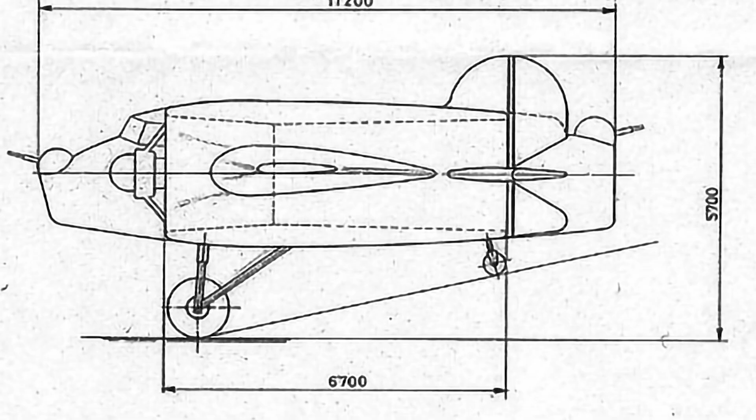The early 1930s were a strange and electric time to be an engineer. Across Europe and America, designers were throwing out the rulebook on what a flying machine was supposed to look like. Biplanes were giving way to monoplanes. Engines were getting stronger. Speed records were being broken and then broken again. It was the kind of era where a genuinely crazy idea could get funded, built, and flown before anyone had time to talk you out of it.

And in the middle of all that ambition and experimentation, one aircraft stood completely apart from everything else. An Italian creation so bizarre in its appearance that serious experts would call it the ugliest airplane ever built, and so ahead of its time that the rest of the world would spend the next several decades quietly catching up to it. The story of the Stipa-Caproni begins not in a factory or a wind tunnel, but in a trench.

Luigi Stipa was born in Italy in 1900. When the First World War came, he interrupted his university education and enlisted with the Bersaglieri Corps, one of the Italian Army's elite light infantry units, known for their distinctive wide-brimmed hats and their reputation for speed and aggression on the battlefield. Stipa survived the war and came home with the kind of focus that tends to follow men who have watched their youth disappear into a conflict they did not start.

He returned to his studies, and he did not stop at one degree. He earned qualifications in civil engineering, then hydraulic engineering, then aeronautical engineering, thus building a technical foundation so broad that it would eventually allow him to see a connection that nobody else in aviation had managed to see.

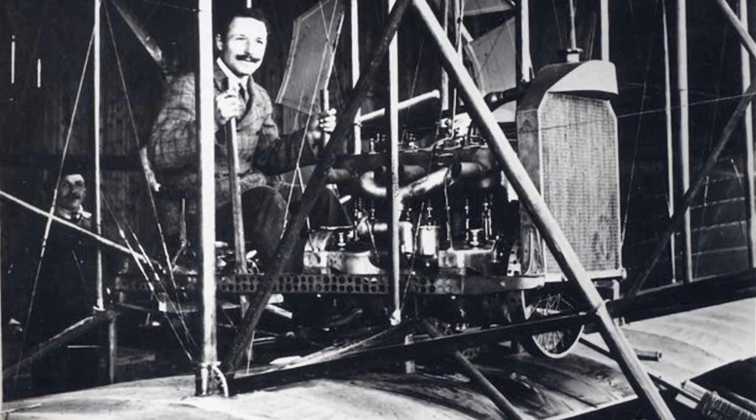After graduating, Stipa joined the Italian Air Ministry and worked his way up through the engineering division until he reached the position of General Inspector of the Air Force Engineering Division. It was a title that gave him both the authority to pursue serious research and the access to the kind of resources that turned theoretical ideas into real hardware.

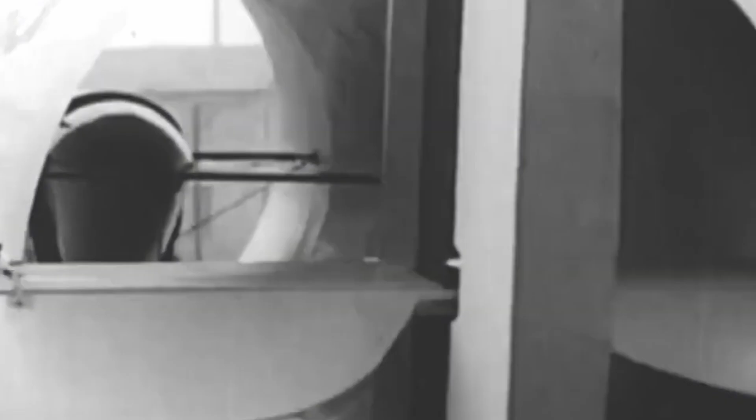And he had an idea, a genuinely unusual one. Stipa had become obsessed with a problem that most aviation engineers of his era had simply learned to live with. Conventional propellers were wasteful. Aircraft engines of the early 1930s lost a significant portion of their power to turbulent, disorganized airflow. The propeller spun, it pulled air, but much of that energy scattered and dissipated before it could be converted into useful thrust. Everyone knew about the inefficiency. Nobody had found a satisfying solution to it.

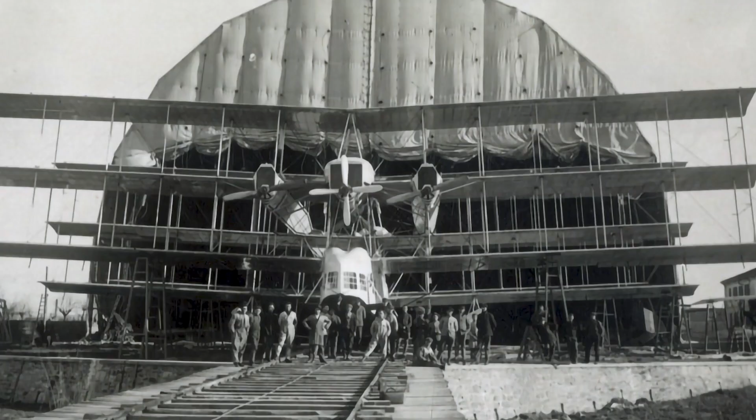Stipa's background in hydraulic engineering gave him a perspective that pure aeronautical engineers did not have. He kept coming back to the Venturi principle, a well-established concept from fluid dynamics stating that when a fluid passes through a narrowing tube, its velocity increases. Engineers had known this for over a century. They used it constantly in hydraulics, in carburetors, in all kinds of applications. But almost nobody in aviation had thought to apply it directly to propeller design. Stipa saw the connection clearly.

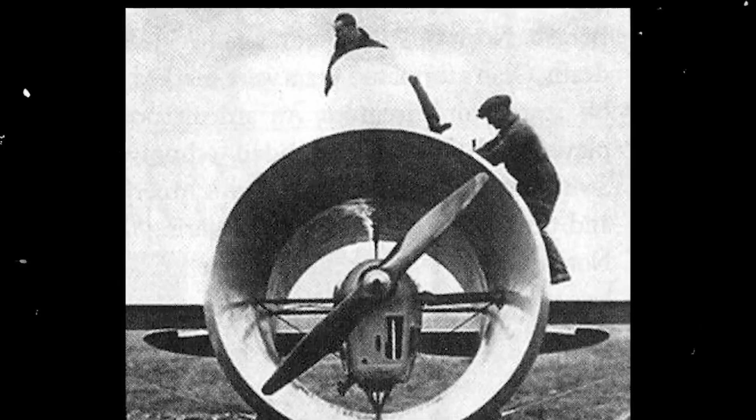If he could enclose a propeller inside a carefully shaped tube that narrowed in the middle, the airflow passing through it would be compressed and accelerated. The result would be dramatically greater propulsive efficiency from the same engine. He devoted years to working through the mathematics at the Air Ministry, calculating the exact shape the tube's interior surface would need to take, the optimum design of the propeller itself, the most efficient distance between the leading edge of the tube and the propeller blades, and the ideal rate of revolution for maximum effect.

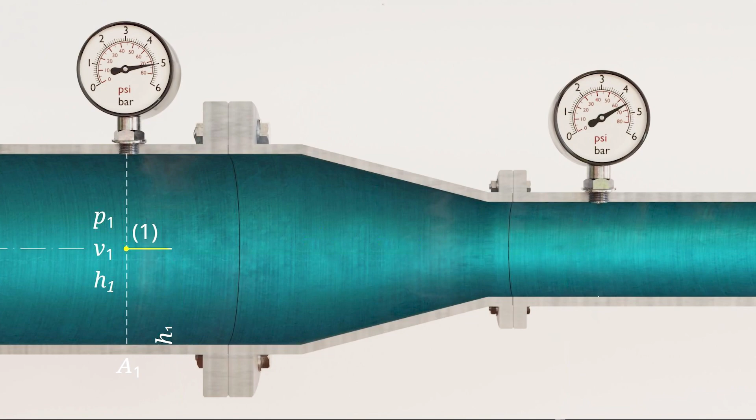Then he arrived at something he had not expected. When he calculated the inner surface shape required for maximum efficiency, it closely resembled the cross-section of an aerofoil. The tube itself, shaped correctly, would generate lift. The thing he had designed to improve propulsion would also, as a side effect, help the aircraft fly. He called his invention the intubated propeller, and he was convinced it could change aviation permanently.

Stipa published his findings in the Rivista Aeronautica, one of Italy's leading aviation journals, alongside detailed designs for a small single-engine test aircraft that would demonstrate the concept in actual flight. The publication attracted attention, but Stipa understood that a paper, however well-reasoned, would not be enough. He needed to build the thing and fly it in front of people who could see it working with their own eyes. He petitioned the Italian fascist government directly, requesting funding for a full-scale prototype. The timing helped him.

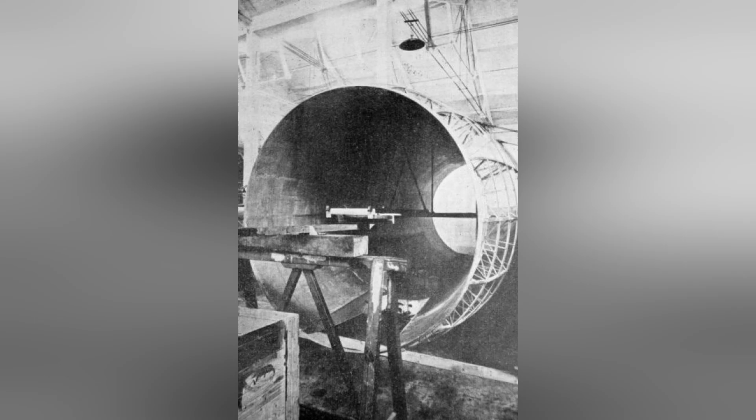In 1932, Mussolini's regime was actively hunting for opportunities to demonstrate Italian technological superiority to the rest of the world, and aviation was one of the fields where national prestige felt most visible and most valuable. Despite the radical nature of what Stipa was proposing, the government said yes. The Air Ministry approved the funding and began looking for a manufacturer capable of building something no aircraft factory had ever attempted before. They needed someone technically skilled enough to handle the engineering challenges and bold enough not to be frightened off by how strange the whole thing looked on paper.

As it turned out, Italy had exactly the right man, and his name was already a legend. Count Gianni Caproni di Taliedo had been building aircraft since 1910, when he constructed the very first airplane ever made in Italy. He had taught himself to fly, and in the early years he had designed his machines largely through trial and error, crashing several prototypes before he managed sustained flight.

But Caproni learned at a remarkable rate. By 1914, just 4 years after his first attempt, he had produced the world's first single-seat tractor engine fighter with a forward-firing machine gun, an achievement that placed him at the absolute forefront of military aviation before the First World War had even begun. When the war came, the Italian military gave Caproni one assignment: build bombers.

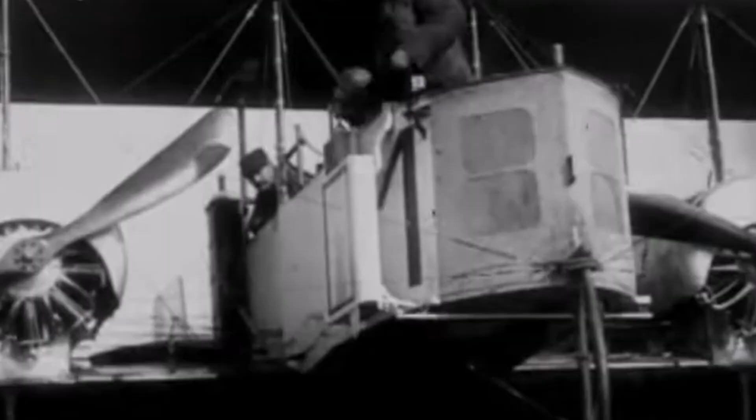He delivered a series of increasingly large multi-engine aircraft that became some of the most formidable strategic bombers of the entire conflict. His CA-3 series carried out long-range raids against Austrian targets. This, and the sheer scale and ambition of his designs, gave him an international reputation as a man who was willing to go bigger and bolder than anyone else in the industry.

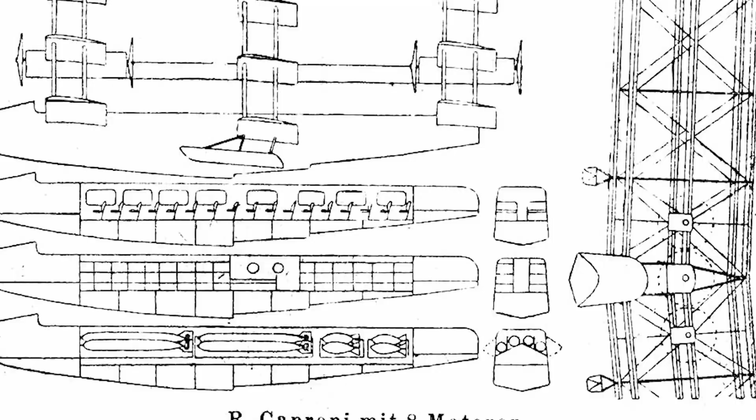After the armistice, most aircraft manufacturers pulled back and played it safe. Caproni did the opposite. His most spectacular post-war attempt was the Caproni CA-60 Transaereo, an enormous flying boat designed to carry 100 passengers across the Atlantic. The machine had 9 wings arranged in 3 sets of 3, 8 engines, and a hull the size of a houseboat. It lifted off Lake Maggiore in March 1921, climbed briefly, then nose-dived straight into the water and broke apart. The wreckage caught fire overnight under circumstances that were never fully explained, and the CA-60 was never rebuilt.

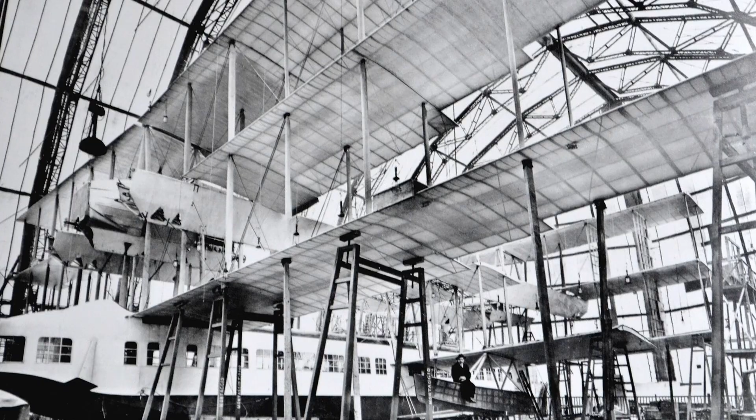But the failure did absolutely nothing to reduce Caproni's appetite for unconventional projects. He kept building throughout the 1920s, and when the Air Ministry came looking for someone to construct Stipa's radical prototype in 1932, the answer was obvious.

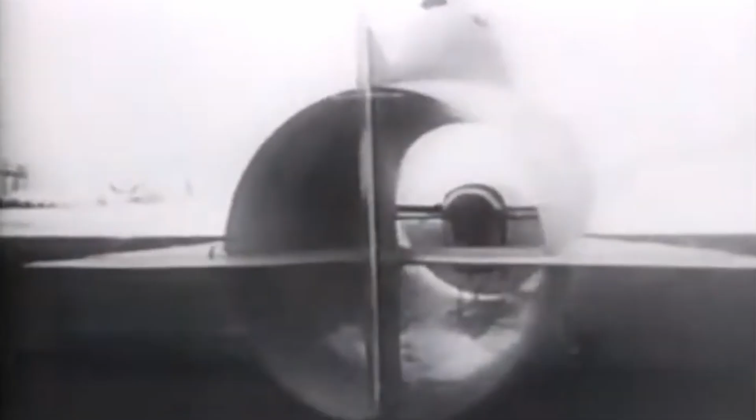The contract called for a single flyable aircraft built around the intubated propeller concept. What that meant in practice was a fuselage that was not a fuselage in any conventional sense. It was a short, fat, barrel-shaped tube made primarily of wood, open at both ends, narrowing toward the middle to form the tapered duct the Venturi principle required. Air would enter through the wide front opening, get compressed as it passed through the narrowing section where the propeller was mounted, and exit through the rear with significantly increased velocity. The entire body of the aircraft functioned as one single massive ducted fan.

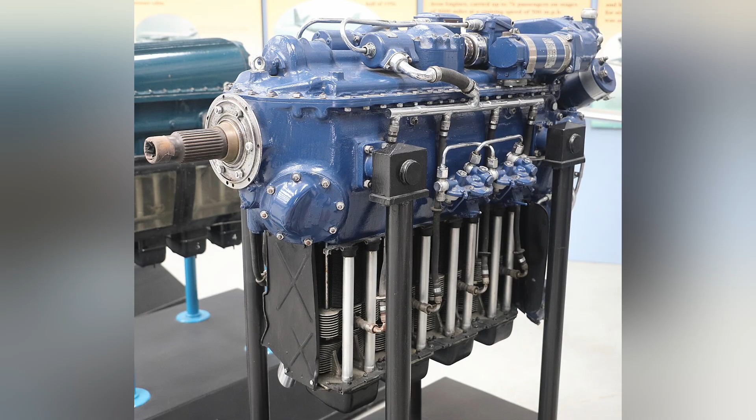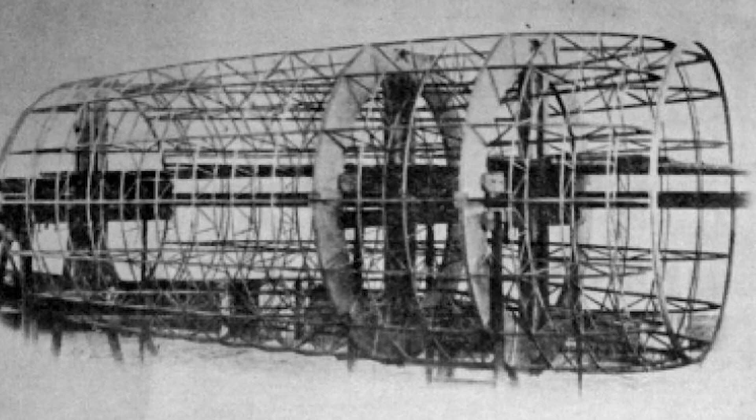Mounting the engine inside this tube required engineering that had no precedent. A single 120 horsepower de Havilland Gipsy III, a 4-cylinder inverted air-cooled inline piston engine, was installed in a nacelle suspended at the center of the duct, with the 2-bladed propeller positioned flush with the leading edge. The engine sat behind the propeller at the midpoint of the tube, and the nacelle had to be supported by structural members carefully positioned to avoid disrupting the airflow that the whole design depended on. Every component inside the tube had to sit in exactly the right place. Even small disturbances to the flow could compromise the efficiency gains Stipa had spent years calculating.

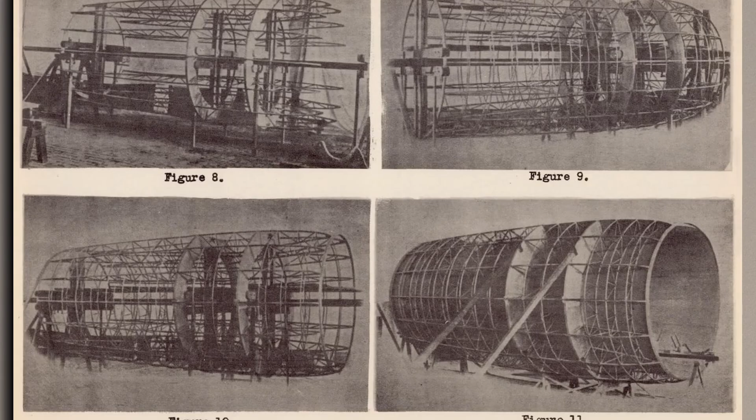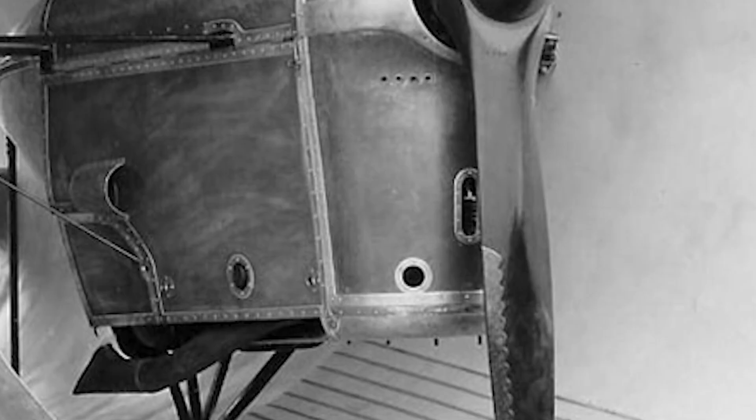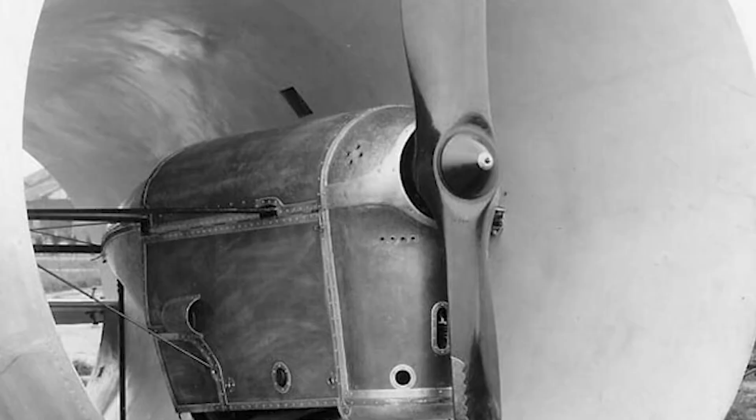The wings created their own problems. The aircraft was configured as a mid-wing monoplane with elliptical wings attached directly to the tubular fuselage. The main spars had to pass completely through the tube and through the engine nacelle inside it, making the internal structure far more complex than the simple barrel-shaped exterior suggested. From the outside, it looked almost comically simple. From the inside, it was one of the most intricate small aircraft anyone had attempted to build.

The world was about to see something it had never seen before. The finished aircraft was a strange thing to look at. The wingspan stretched nearly 47 feet across. The fuselage was barely 20 feet long.

The result was a machine that was more than twice as wide as it was long, squat, and barrel-shaped, sitting low to the ground on stubby fixed landing gear with wheel spats. It looked less like an airplane and more like someone had attached wings to an oversized oil drum and dared it to fly. No other aircraft in existence looked anything like it.

Gross weight came to 1,874 pounds. Empty weight was 1,257 pounds. The strange machine was complete. Now someone had to fly it.

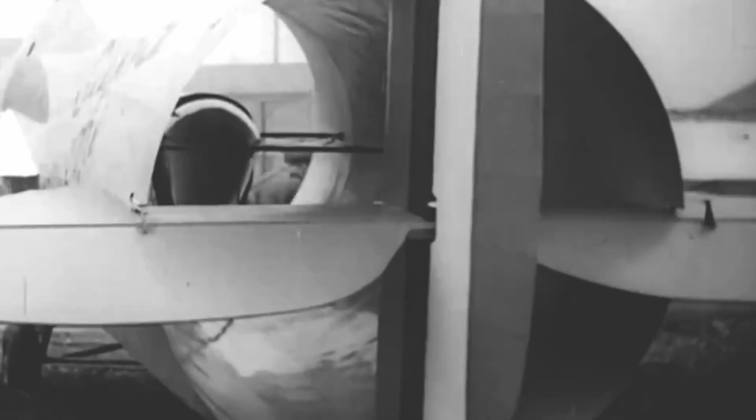On October 7, 1932, Caproni Company test pilot Domenico Antonini climbed into the forward cockpit and prepared for the first flight. Ground crews had already run the de Havilland engine through its checks. The 2-bladed propeller was spinning inside the barrel fuselage, pushing compressed air through the tapered duct with a sound that observers immediately noticed was different from anything they had heard before, quieter, more muffled, as if the tube itself was swallowing part of the engine noise before it could escape. Antonini released the brakes. The aircraft rolled approximately 590 feet before lifting cleanly into the air.

What the people watching saw next stopped them. A stubby barrel-shaped machine climbing steadily away from the field, its wide wings holding it aloft, looking for all the world like a piece of industrial equipment that had somehow decided to become an aeroplane.

The flight data confirmed what Stipa had spent years calculating. The intubated propeller was working. The compressed airflow through the Venturi-shaped fuselage was converting a greater percentage of engine power into usable thrust than a conventional open propeller of the same size and rating could manage. The aerofoil-shaped interior of the duct was generating additional lift exactly as predicted, supplementing the wings in a way nobody had ever achieved before on a production airframe.

The numbers that came back from those early flights were remarkable. Landing speed was just 42 miles per hour, significantly lower than anything with comparable power and wing loading could match. The landing roll was approximately 590 feet, identical to the takeoff distance. The rate of climb exceeded other aircraft in its power and weight class despite having only 120 horsepower available. Service ceiling reached approximately 12,100 feet. Wing loading sat at just over 9 pounds per square foot at maximum gross weight.

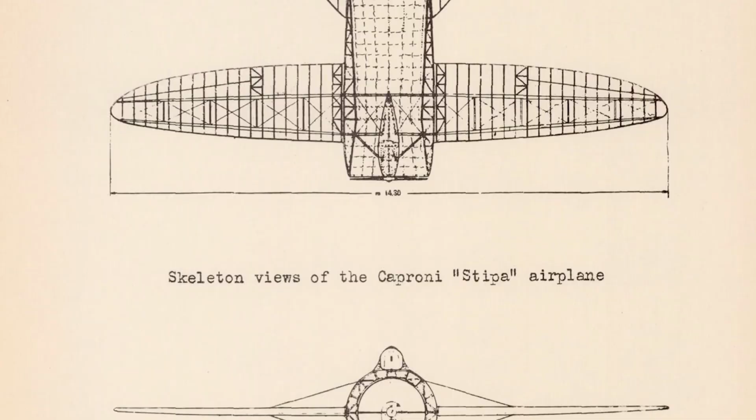The tubular fuselage that made the intubated propeller work also produced an enormous amount of aerodynamic drag. The blunt barrel-shaped body pushed through the air with far more resistance than any streamlined conventional fuselage, and that drag penalty was severe enough to cancel out every efficiency gain the ducted propeller system delivered. Top speed was limited to 83 miles per hour. Contemporary single-engine aircraft with similar power were going faster. The aircraft designed to demonstrate a more efficient approach to flight could not outperform the machines it was supposed to replace. The Regia Aeronautica canceled further development.

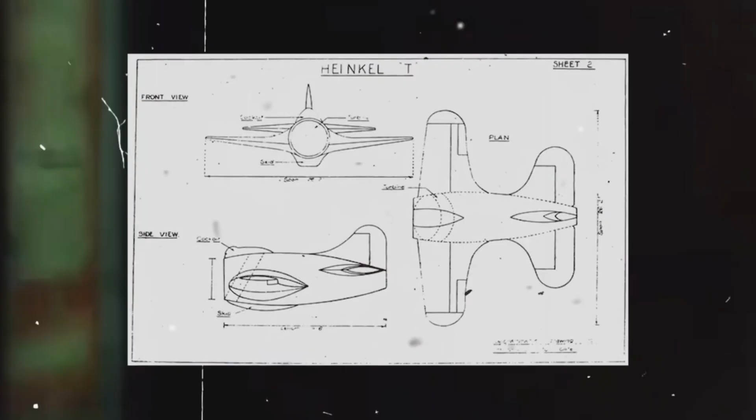No additional prototypes would be built. Stipa had always understood this would happen. The single-engine prototype was never his real vision. It was a proof of concept, a demonstration built to show that the intubated propeller worked in the air and not just in calculations. His actual ambition was far larger.

He had sketched designs for multi-engine flying wing aircraft where several ducted propellers would be integrated directly into an enormous airframe. In those configurations, the drag problem would largely disappear because the ducts would make up a small proportion of the total structure rather than constituting the entire fuselage. Some of his blueprints featured as many as 6 engines housed in ducted nacelles across wingspans that dwarfed anything flying at the time. None of those designs ever left the drawing board.

But Stipa moved quickly to protect what he had built. He filed patents for the intubated propeller not only in Italy, but also in the United States and Germany, securing legal ownership in the 3 countries where aviation development was advancing fastest. The American patent was issued in February 1937 under the title Airplane, covering the core principles of the ducted propeller system. Stipa believed the idea had value far beyond what a single slow prototype had demonstrated.

He intended to make sure nobody could use it without his knowledge. He was right about the value. He was wrong about being able to protect it. The military had moved on. The Italian government had other ideas.

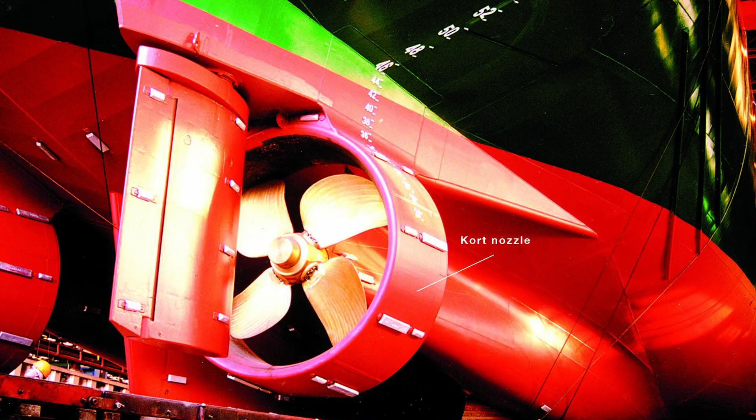In Germany, a parallel development appeared 2 years after the first flight. In 1934, German engineer Ludwig Kort patented a ducted fan system operating on principles that were strikingly similar to what Stipa had demonstrated in the air over Italy. The Kort nozzle enclosed a propeller within a shaped duct to improve thrust efficiency.

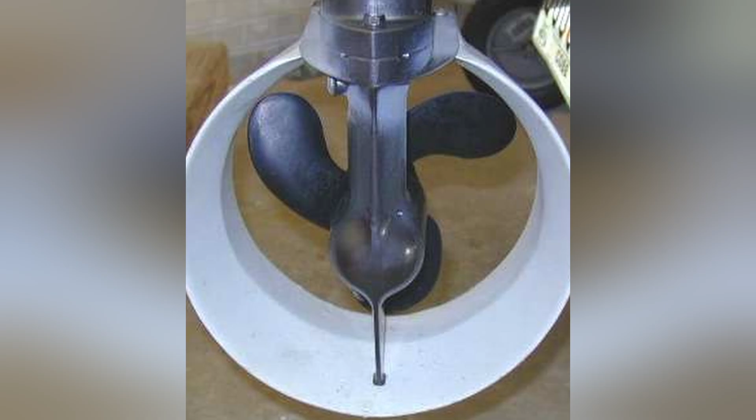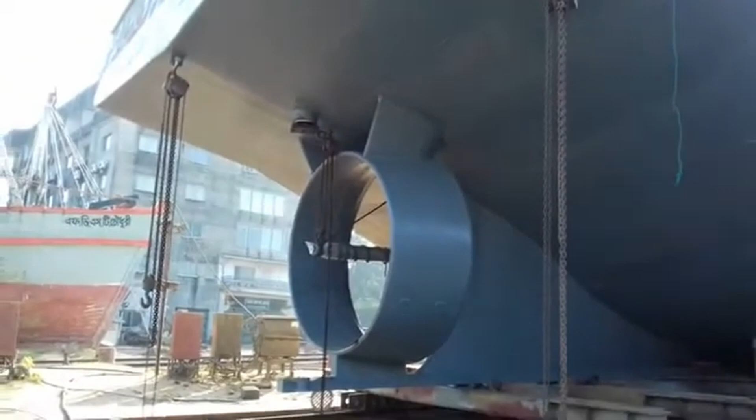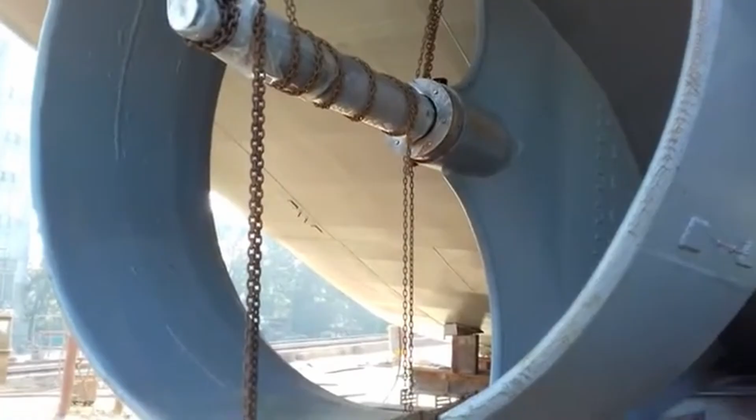The same fundamental idea, applied not to aviation, but to ships. The system proved highly effective on vessels requiring high thrust at low speeds, and the Kort nozzle remains in use on tugboats and working vessels around the world to this day. Whether Kort developed his design independently or drew on the widely published Italian research has never been definitively settled. The timing and the similarities are difficult to look past.

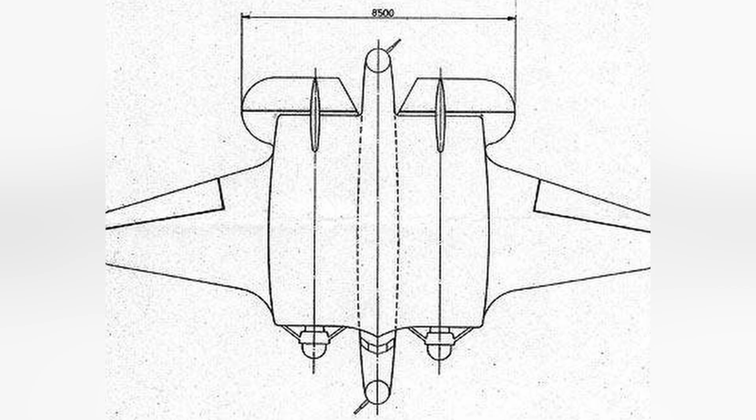France took the most ambitious step. French military planners saw the intubed propeller as a potential solution for a new generation of combat aircraft and commissioned a night bomber incorporating ducted propellers based directly on the Italian designs. The contract went to ANF Les Mureaux, and the resulting aircraft was designated the BN-4.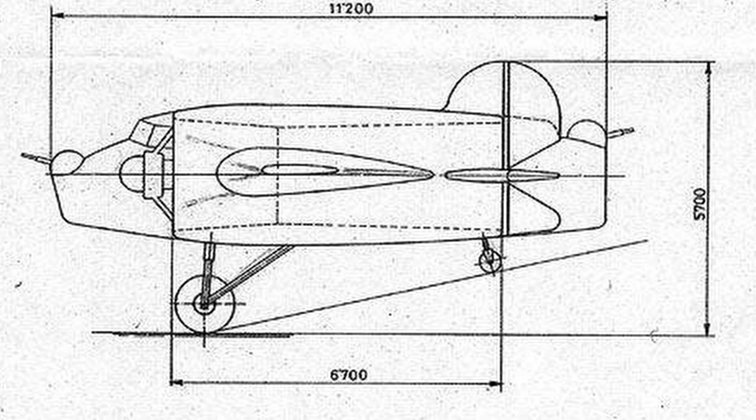The specifications were genuinely impressive for the mid-1930s. A crew of 4, retractable landing gear, 2 power-operated gun turrets, a wingspan of 59 feet, a projected top speed of 233 miles per hour, a range of 1,242 miles, and a service ceiling of 33,136 feet. These were not the numbers of a curiosity. These were the numbers of a serious combat aircraft.

The BN-4 could have proven that the intubated propeller worked when scaled up to a real warplane. It never got the chance. In the mid-1930s, the French government nationalized the aviation industry, merging private manufacturers into state-controlled groups and reassigning contracts across the board. The upheaval swallowed dozens of programs, and the BN-4 was among them. The night bomber was shelved before a single airframe was assembled.

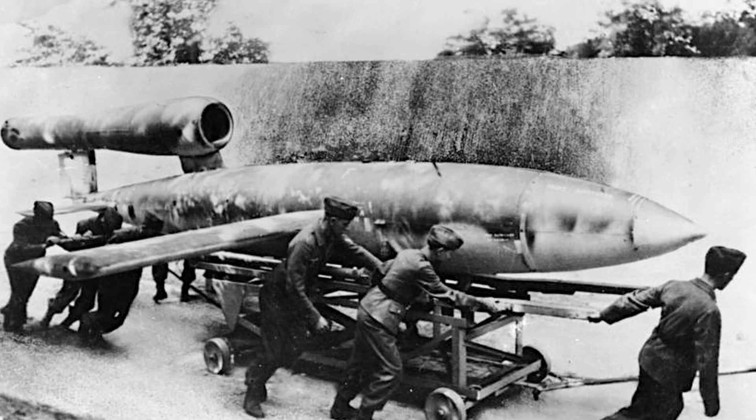Another door closed. Then the Second World War came, and Stipa watched Germany deploy the V-1 flying bomb against England. The weapon used a pulse jet engine to drive an unmanned airframe carrying a warhead across the English Channel, and Stipa became convinced the Germans had stolen his patented designs to build it.

He pointed to his patents filed in Germany and argued that the ducted engine concept had been lifted directly from his intubated propeller. The engineering community disagreed.

The V-1's Argus pulsejet operated on a completely different principle, a series of controlled fuel and air explosions inside a resonating tube, with intake valves opening and closing rapidly at the front to sustain the combustion cycle. There was no propeller, no venturi compression, no aerofoil-shaped duct. The resemblance was superficial and the claim was broadly rejected.

But Stipa remained adamant. The perceived theft deepened a bitterness that had been building for years, a growing sense that the world was using his ideas while refusing to acknowledge where they had come from.

The most direct successor came from Italy itself. In 1940, the Caproni company flew a new aircraft called the Caproni-Campini N1. The connection to Stipa's work was not coincidental.

The N1 used a conventional 900 horsepower Isotta-Fraschini radial piston engine to power a variable pitch ducted fan compressor enclosed inside the fuselage. Air entered through a large nose intake, was compressed by the engine-driven fan, and passed into a combustion chamber in the tail where additional fuel was injected and ignited. The heated gases exited through a rear nozzle, producing thrust that looked and behaved remarkably like what a jet engine would produce.

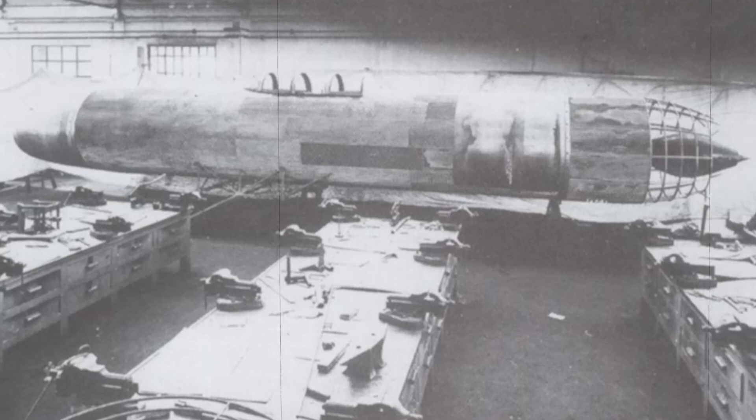The conceptual line from Stipa's intubated propeller to the Campini motorjet was direct and clear. Both used a piston engine to drive a ducted compressor. Both managed airflow through a shaped internal channel to increase propulsive efficiency. One had led to the other.

After the war, jet aviation exploded. Turbojet and turbofan engines transformed everything, and Stipa watched it all from the outside, becoming increasingly convinced that the modern jet engine had descended directly from his intubated propeller.

The core principle was the same: compress air through a ducted fan to generate thrust, rely on the shape of the duct to improve efficiency. He had demonstrated that in October 1932 above an Italian airfield in a machine everyone called ugly.

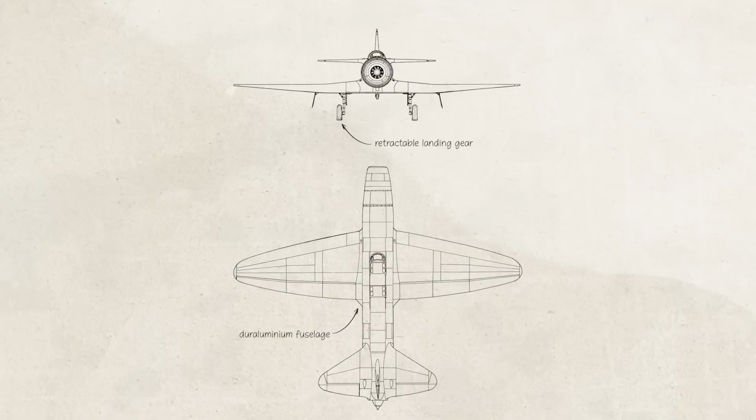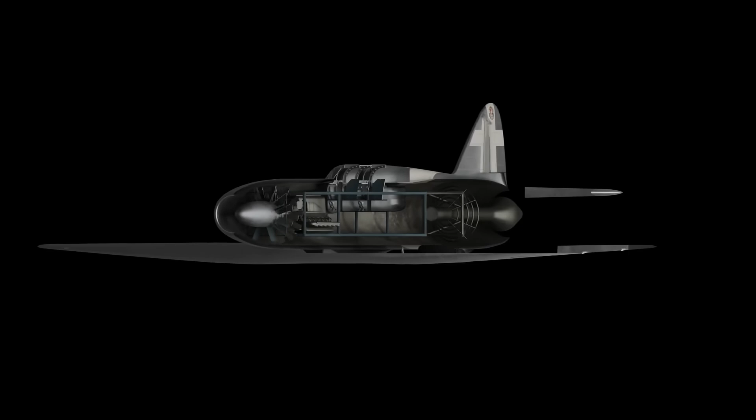Several aviation historians acknowledged the similarities. A 1959 academic publication on jet propulsion explicitly classified the Stipa-Caproni as an early jet aircraft and described it as a predecessor of modern jet-powered flight.

The Kort nozzle was in use on ships around the world. The afterburner principle had been demonstrated in Italian skies. Yet ducted fan technology had become fundamental to how humanity moved through the air. And nobody was giving Stipa the credit.

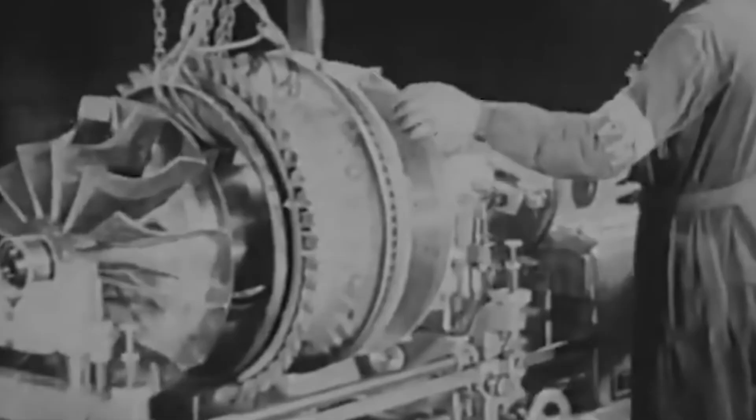He spent his remaining decades watching the world build on ideas he believed he had pioneered, frustrated by an aviation establishment that treated his creation as an interesting footnote rather than the milestone he knew it to be.

Luigi Stipa died in 1992 at the age of 92. The patent had been issued, the flights had been flown, the papers had been published, and the world had largely moved on without saying his name.

But his story did not end there. In Australia, an aviation enthusiast named Lynette Zuccoli and the team at Aerotech Queensland decided to do something about it. They designed a 3/5 scale flying replica of the Stipa-Caproni, but accurate down to the paint scheme and the Italian flag markings on the rudder, powered by an Italian-made Simonini racing engine.

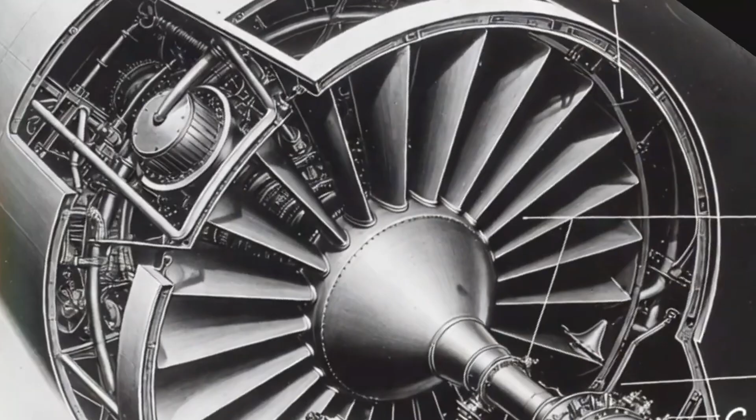Construction was completed in 1998. Three years later, in October 2001, 69 years to the month after Domenico Antonini's historic first flight, Australian pilot Bryce Wall took the replica into the air and completed 2 test flights, each covering approximately 600 meters at about 6 meters altitude. He reported that the small aircraft was remarkably stable, that it behaved almost exactly as the Italian pilots had described the original nearly 7 decades earlier.

The machine that critics had dismissed as the ugliest airplane ever built still flew precisely as its creator had designed it to. Stipa had been right all along. He just never got to hear anyone admit it.